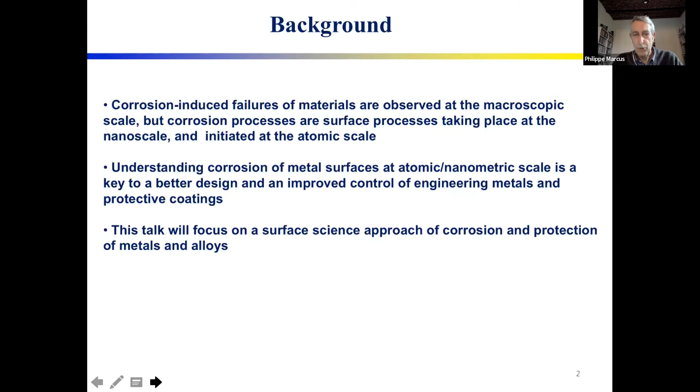What I'm going to talk about today needs maybe a short explanation of the background. Corrosion-induced failures of materials are observed at the macroscopic scale, obviously, but corrosion processes are surface processes, and they take place at the nanoscale, and even initiate at the atomic scale. For this reason, understanding corrosion of metal surfaces at the atomic or nanometric scale is key to better design and improved control of engineering metals and protective coatings. So in this talk, I'm going to focus on a surface science approach of corrosion and protection of metals and alloys.

So all of the data presented today are based on the use of advanced surface analytical techniques, which are combined with electrochemical measurements and, in many cases, combined with DFT modeling and simulation. In a general way, surface oxides and passive films are very important because they cover the metal substrate, and in many cases they protect the material against corrosion. These films are extremely thin, and usually consist of an oxide and oxyhydroxide. Their stability is of primary importance for many metallic materials.

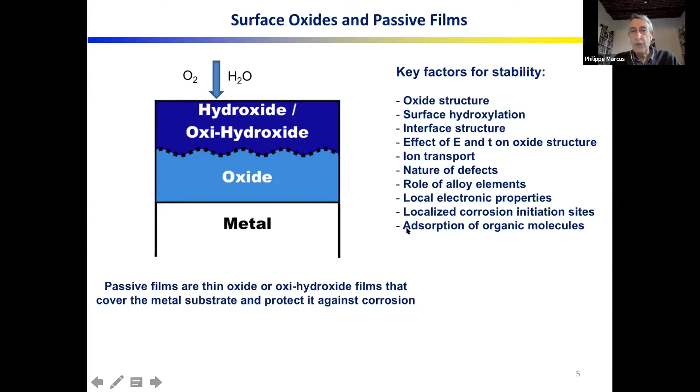To look at these problems, we need methods for the characterization of metal surfaces, oxide films, and corrosion processes. We need high resolution methods if we want to understand the initiation of corrosion. If we want a high image resolution, we use scanning tunneling microscopy. If we want in-depth resolution near the surface, we use time of flight secondary ion mass spectrometry. If we need good chemical state resolution to investigate the nature of surface oxides or surface compounds, we use X-ray photoelectron spectroscopy. If we want mass resolution, which is very important when studying molecules at surfaces like organic inhibitors, we again use time of flight secondary ion mass spectrometry.

As I said in the introduction, we combine these techniques with electrochemical measurements and in many cases with DFT calculations. Among these techniques, I will show results obtained using scanning tunneling microscopy. As a brief reminder, in this technique we bring a metallic tip close to the surface, and if the tip is close enough, electrons can tunnel from the tip to the sample or from the sample to the tip.

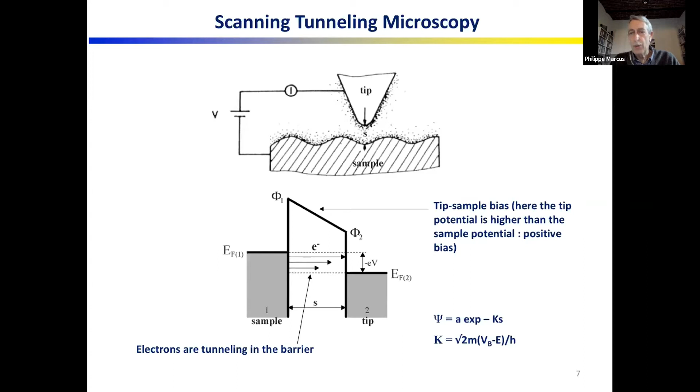We scan the tip along the surface and measure maxima in the tunneling current, which correspond to the position of atoms. So we can get an image of the topography of the surface with atomic resolution. Of course, we can also get an image with lower resolution, but atomic resolution is currently obtained, and this can be done in vacuum, in gas, or in a liquid.

If we use a bipotentiostat, we can do electrochemistry, and at the same time, we can scan the tip and observe the surface with high resolution. I'm going to show some results that have been obtained in the recent past, and then show you what are the current problems on passivity of metals and alloys studied at the atomic or nanometric scale.

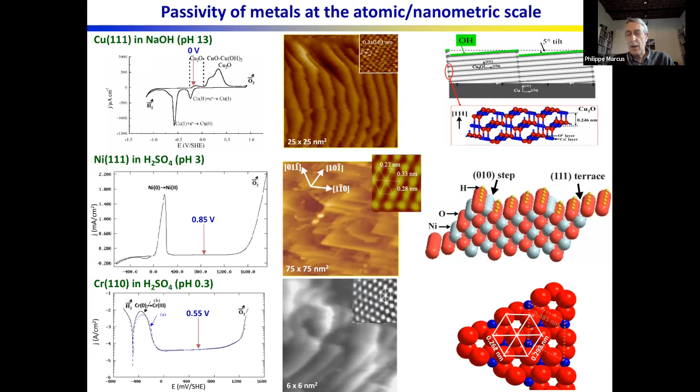So we can say that passivity is now fairly well understood at the atomic or nanoscale, because it has been studied on several metals, not all of them, but several. Some general features: passive films are generally crystalline, we observe epitaxial growth on metal substrates, interface energy is minimized by the tilted growth of the oxide with respect to the crystallographic orientation of the surface, and surface energy is minimized by hydroxylation.

The work I've shown was done on single crystals to get rid of grain boundaries, but these conclusions can be extended to each grain at the surface. They are not restricted to single crystals; they would apply to individual grains of polycrystalline materials. As for grain boundaries, there are parallel studies, because the reactivity of grain boundaries is different from the reactivity of grains. Of course, we need to know about alloys and not only pure metals.

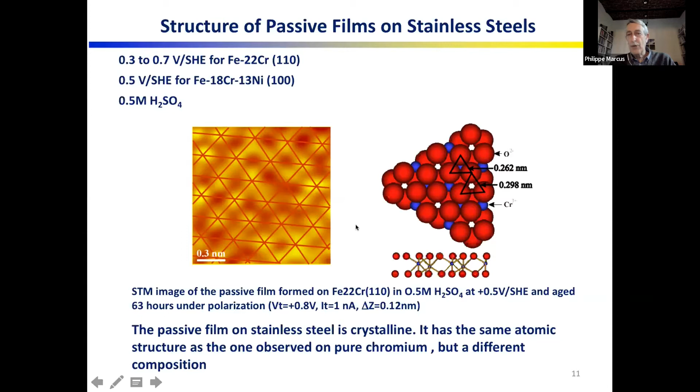We have shown in other works that the time of exposure in the passive region provides better resistance to localized corrosion in chloride solution. This is due in part to the enhanced crystallinity demonstrated here. The other factor is the enrichment of the passive layer with chromium. So chemical effect is of course very important. An oxide rich in chromium has better corrosion resistance than an oxide with less chromium on stainless steel, but also the extent of crystallinity is a critical factor.

So that is where we stand. And of course, there is still something we need to understand better in terms of corrosion resistance, and also how we can improve the corrosion resistance of stainless steels, which is already quite good, but stainless steels are not perfect.

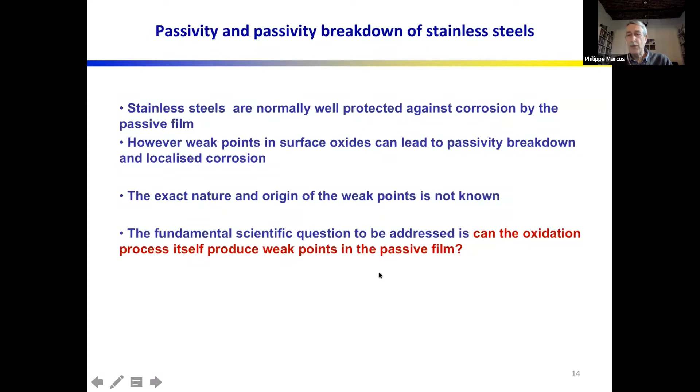And of course, to study that, we need very advanced techniques. This is the equipment we have been using for a couple of years. It's a new platform that integrates multi-technique and environmental tools for spectroscopic, microscopic, and electrochemical analysis of surfaces.

This is a sort of unique equipment in which we can prepare surfaces under gas or in UHV conditions. We can do thermal treatments and transfer samples to different parts of this equipment. In one part, we can look at the structure by scanning tunneling microscopy in a variable temperature system, so we can vary the temperature and also expose the surface to gases. In another part, we can do in situ XPS, that is, XPS in the presence of gas, and make real-time measurements of oxidation in a gas environment.

And finally, we can transfer the samples inside this equipment to a glove box in which we can do some analysis of the solid-liquid interface, with electrochemical scanning tunneling microscopy. So it's a sort of material science or surface science lab in which we can do surface preparation, heat treatments, exposures to gas and liquids, and analyze the surface chemically and structurally without exposing it to air.

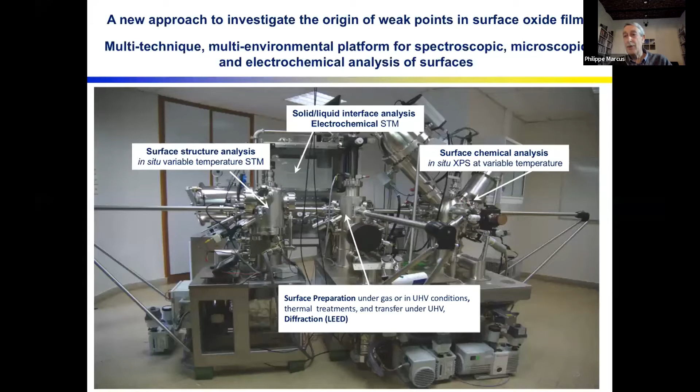So we can look at the very initial stages of reactions, which I believe govern the life of a material. A good part of the life of a material is what happens in the early stages, which remains a major ingredient to understand the life of a material.

So with such equipment, we can prepare very pure, very clean surfaces like what you see here. It's the surface of stainless steel, an austenitic stainless steel. You can see by looking at the XPS that it's extremely clean, there is absolutely no oxide. This is the iron signal here, and this is the chromium signal. We don't show nickel because nickel is anyway not oxidized. But you see that it's a purely metallic surface.

And we can look at the surface by STM, and we see this interesting structure with terraces and steps. We see that under equilibrium, there are vacancies at the metal surface. This is a completely new finding, because people saw that if you had a clean stainless steel surface, you would have no vacancies. But this is not the case.

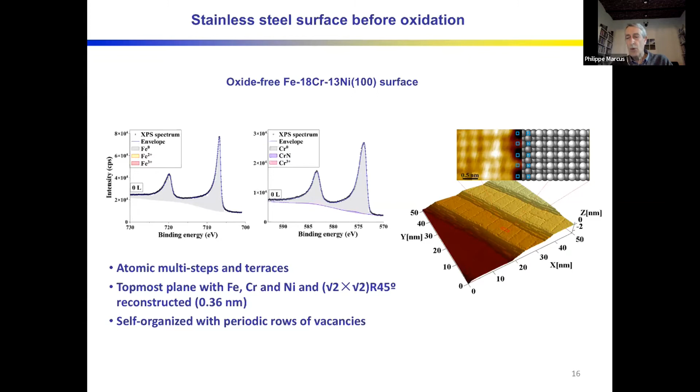There is a network of vacancies, and you can see that these vacancies are aligned in a well-defined direction. So now with such a very clean and well-defined surface, we can look at very early oxidation stages, and we can look at oxidation as a function of exposure.

This was done at 250 degrees in low oxygen pressure so that we have time to follow the phenomena. This can be done in the XPS, and we can measure the oxygen signals while the material is being oxidized, so we can look at exposures that are very low.

Just a reminder, 1 Langmuir is an exposure that is 1 second at 10 to the minus 6 torr of pressure. That's the Langmuir unit in the international system of units. So looking at this scale of time at low pressure is equivalent to looking at just the first few nanoseconds of oxidation at ambient pressure.

That provides a unique way to look at the nucleation and growth of oxides, in that case on stainless steels. We can see that we have first a striking enrichment of chromium at the surface, then it goes down because iron starts to be oxidized.

So this is the XPS. Now we can look at that at the same time by scanning tunneling microscopy. This is a high resolution image before oxidation, with a very clean surface and these rows of vacancies. When we expose this surface to oxygen, you can see these small islands here, which are nuclei of oxides.

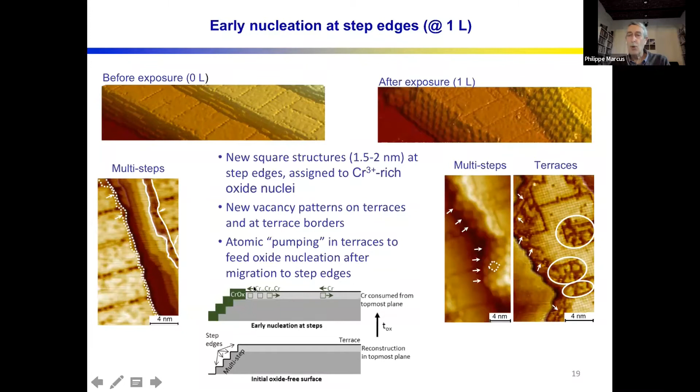We believe that this is a major observation because we can predict that there will be an area here near the step edge where chromium concentration will be lower. So what will happen there?

Then if we continue the oxidation and look at a slightly longer exposure, if you look at the STM image, you can see that now the terraces are also covered by oxide, which have the same structure as at the beginning. So these are chromium oxide islands, but we have other features that are near the step edge.

And if we look at them in detail, they are shown here. They are consistent with the formation of iron oxide rather than chromium oxide. So this is the model here.

At the beginning, we have formation of chromium oxide, so we have depletion of chromium in this area, and that's where iron oxide will then form, just because the chromium concentration has been decreased.

We believe that these areas will be weak points for the corrosion protection by a surface oxide. We did some experiments in an electrolyte, and this is the way the weak points are created by the oxidation process itself.

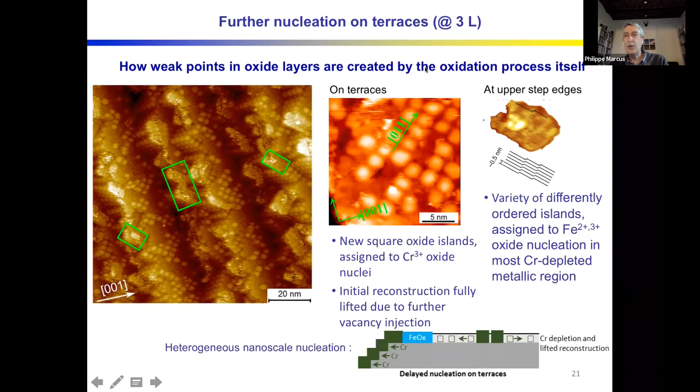Which means that in the future, we will have to find ways to heal this defect. So this opens the way to, I think, a wide range of nano-engineering that we and other labs are now exploring.

So how to heal these defects, these chemical defects that are created by the oxidation process itself, that are independent of the presence or not of inclusions.

Let me now move to another part of this talk, switching to corrosion inhibitors. Why inhibitors? Well, for obvious reasons, surface oxides are not always protective enough, so there is a need for surface treatments that can include conversion coatings, but also corrosion inhibitors.

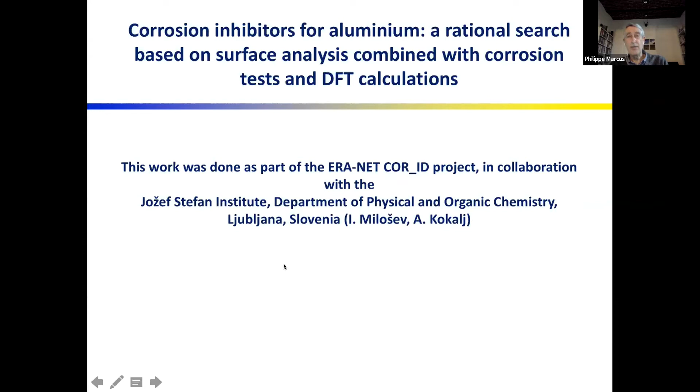So what is the aim of this approach? Well, this is shown here in the background. If we want to provide corrosion protection with organic inhibitors, we need to look at the affinity of organic molecules with the surface, which is, in the case of aluminum, a hydroxylated aluminum surface.

So what do we want to understand? We want to decorrelate, or disentangle, the role of the anchor group on corrosion inhibition and the role of the chain. So what we did here is look at two key factors: the effect of the type of anchor group for a given length of alkyl chain, and the effect of the chain length for a given anchor group, because both the anchoring group and the length of the chain are important.

I'm going to show a few results where, for example, we looked at carboxylic acids with a different number of carbons in the alkyl chain, and then we looked at a fairly wide range of anchor groups for the same alkyl chain.

So let's start with looking at the effect of the chain length. We did that on an aluminum surface. In that case, it was pre-treated so that we have a rough surface which is formed.

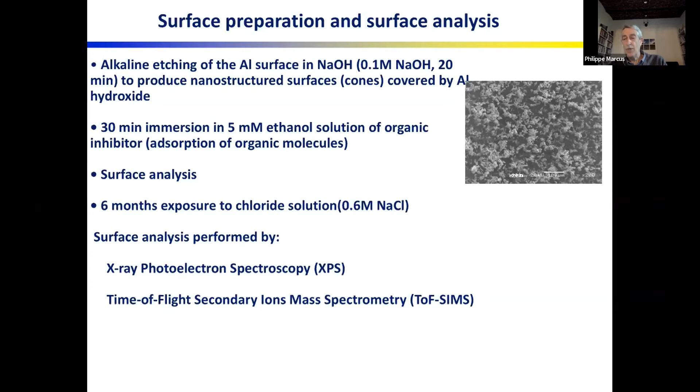Then we expose the surface to an ethanol solution containing the organic inhibitor. We analyze the surface by surface analytical techniques. Then we expose the surface for 6 months in chloride solution, and again we perform surface analysis. So we can combine a corrosion test and surface analysis and try to understand what are the key factors for the choice of good corrosion inhibitors.

So to do that, we used XPS. I think you all know the principle of XPS: we use an X-ray source, photoelectrons are emitted, and we analyze the energy and measure the number of electrons, so we can get an insight on the organic molecule layer, the nature of the oxide under the organic molecules, and the base metal.

And this is the equipment that we are using in my lab. This technique is quantitative, meaning that we can not only identify the nature of the surface species, but we can also calculate their concentration. We can also calculate the thickness of the organic layer, the thickness of the oxide. So it's an extremely high efficient technique.

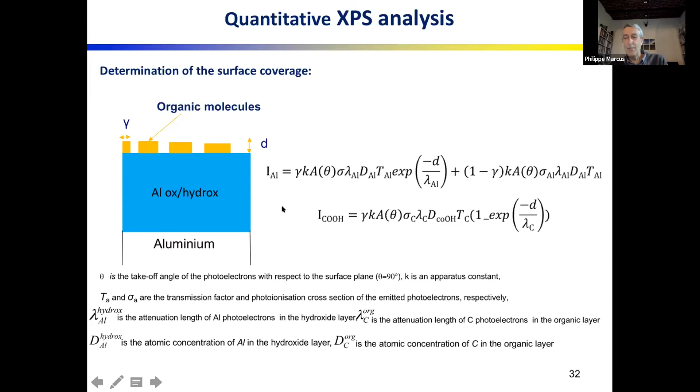We also use time of flight SIMS, which in general for corrosion research, and in particular here for looking at corrosion inhibitors. And this is the principle.

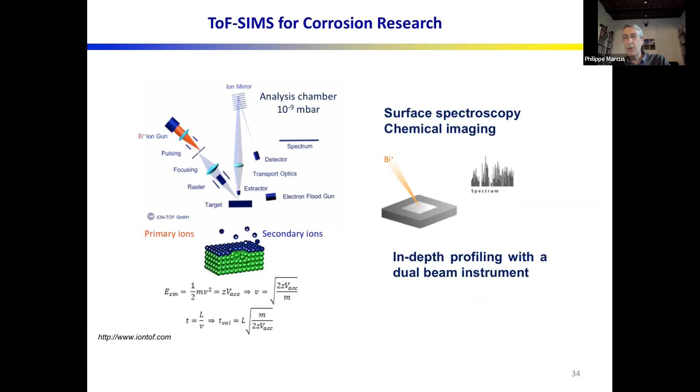Here we have a beam of primary ions that are hitting the surface. Secondary ions are emitted and analyzed, and this analysis provides a mass spectrum in which we can detect all the masses and all the elements at the surface. We can combine this with a second beam to make in-depth profiles. And this is the equipment that we are using in my lab.

So first, we looked at adsorption of octanoic and stearic acids, and the XPS is telling us that both organic inhibitors are adsorbed at the surface. We can state that by looking at the carbon 1s signal. And from the aluminum and the oxygen, we can also derive the chemical states of the aluminum, the amount of oxide and hydroxide.

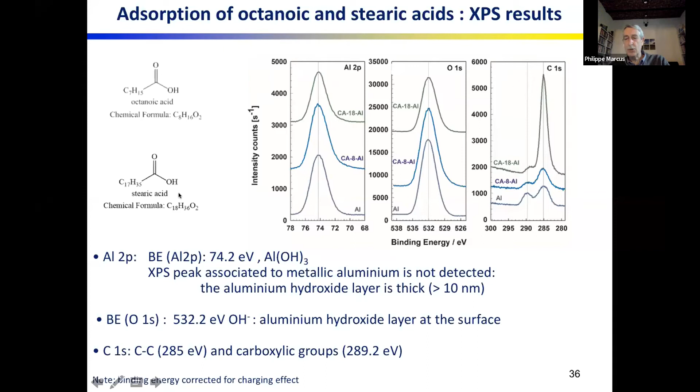So the conclusion here is that both the octanoic acid and the stearic acid are adsorbed at the surface. However, if we look at the quantitative results, we find out that the coverage is different, and that only stearic acid gives a complete layer of organic molecules. The coverage obtained with octanoic acid is lower than the one obtained with stearic acid.

If we look at the time of flight SIMS, so these are mass spectra obtained, the top row for just the aluminum, the reference, is the blank experiment.

Second row, that's after exposure to octanoic acid, and third row after exposure to stearic acid. And you see that, for example, if we look at the mass of octanoic acid, there is a clear signal after exposure to this inhibitor, but no signal in the other case.

So we can conclude that there is indeed adsorption of octanoic acid in this, and this is in agreement with the XPS. Similarly, for the stearic acid, we observe a significant peak at the mass of stearic acid. So this confirms what we have observed by XPS.

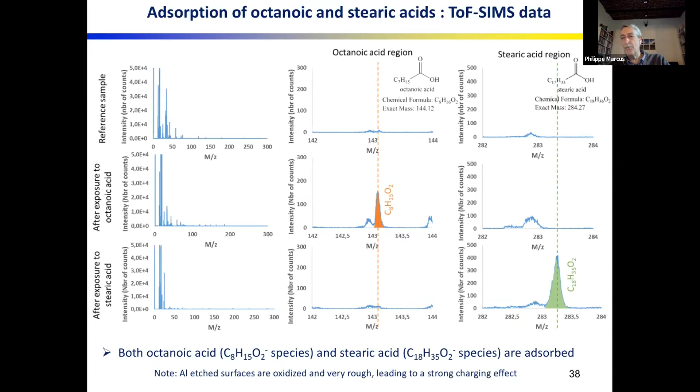With TOF SIMS, we can get an additional measurement, is that we could look at fragments of the molecules that contain aluminum. Here we looked at a fragment containing one aluminum atom, and here we looked at fragments containing two aluminum atoms.

And you can see that if you look at the octanoic acid, we find signals for fragments containing one aluminum and containing two aluminums. And this is also the case for stearic acids. So we can conclude here that the inhibitor is bonded to one or two aluminum atoms.

And this is, of course, a key feature, is the nature of the chemical bonding of the organic molecule to the oxidized surface. Now we look here at the surface after immersion in sodium chloride for 6 months.

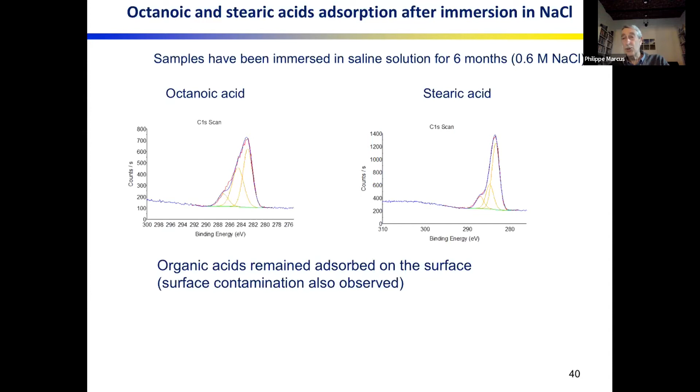And you can see that for both octanoic and stearic acid, there is still a signal associated to the organic acid, which can be observed by looking at the high binding energy where we observe the carboxylate group. So in both cases, the molecules are still there. However, there is also some surface contamination in addition to the presence of the organic acids.

Now we looked at the nature of the carbon chain for some other molecules, octyl benzoic acid, and we also looked at perfluoro inhibitors for comparison. So to make a long story short, we look at the fluorine 1s spectrum for the perfluoro molecule because it's a very good marker of the presence of the molecule.

And in these three cases here that I'm showing with my pointer, you see that we have a fairly intense fluorine 1s peak, which means that all these perfluoro molecules are well adsorbed and bonding to the aluminum surface.

And this is the case also of this octyl benzoic acid, according to the presence of these two CO and COOH functional groups. And we can at the same time, not at the same time, but on the same material with the same inhibitors...

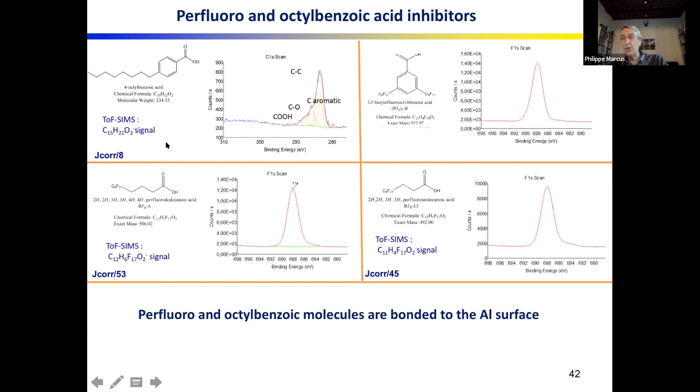We did measurements in collaboration with the lab in Ljubljana on the corrosion current. And what is shown here is the change of corrosion current provided by the molecule. So now what we are doing is we are relating the advanced surface analysis showing whether the molecule is bonded or not with the corrosion test that is telling us what is the beneficial effect of the molecule.

So obviously, you don't expect that they will be good inhibitors.

Now we looked at phosphonic acid, and we looked at this molecule, which is the octyl phosphonic acid, and we could clearly detect the phosphorus 2p signal both before immersion in sodium chloride solution and after immersion. So the conclusion here is that this molecule is adsorbed on the aluminum surface, and it remains adsorbed even after a long time immersion in the solution.

And the same conclusion was obtained by looking at the mass spectra by TOF-SIMS, by looking at molecules that contain the phosphonic group. And we could also look at fragments containing aluminum atoms. And in that case, we could see that the molecules are bonded to 2 or 3 surface aluminum atoms, in contrast with the carboxylic groups that were bonded to 1 or 2 surface aluminum atoms.

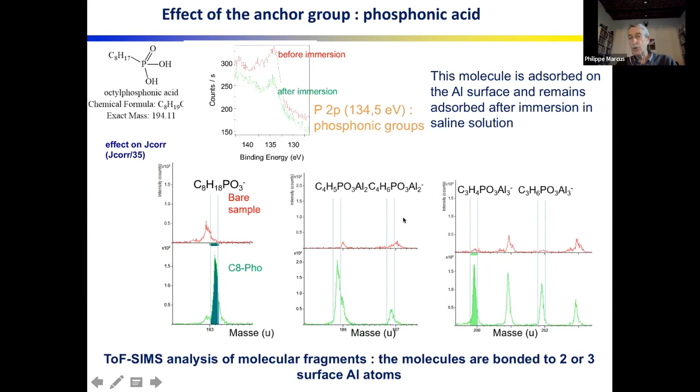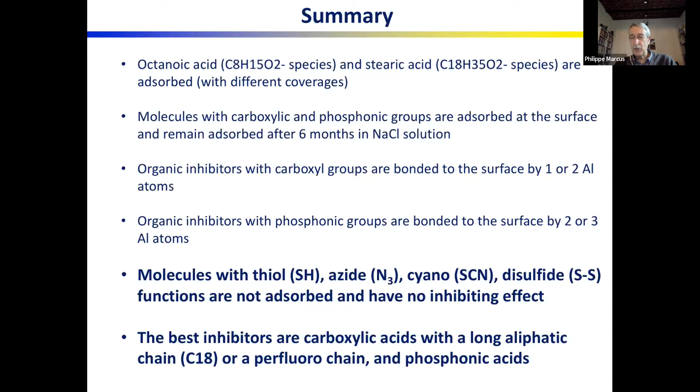Okay, I think my time is over, so I will skip the last part, which was on DFT calculation, but there will be a talk later today on DFT, so DFT will clearly be represented in this symposium.

So just a general conclusion: there has been significant progress in understanding surface corrosion processes at the nanoscale, and I should say also at the nanometric and molecular scale, and that included passivation and inhibition.

And that can be achieved by a surface science approach in which surface chemical and structure characterization is combined with electrochemical measurements. Although I have not shown that today due to lack of time, this is very often combined with modeling and simulation.

And the reason is that the experiments we are doing, being at the nanometric, atomic, or molecular scale, can be directly translated into DFT.

And that's very important, because when you choose the model in DFT, you need experimental results to choose the right model. And as our experiments are done at the same level in terms of dimensions as DFT, we can use the measurements to start with the right DFT model.

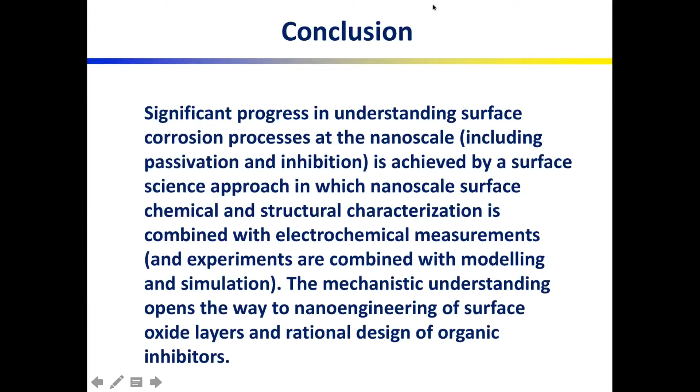Yes, I have just one question for the Professor. Yes, in the area of inhibitors, this is a fundamental study, which is very important. But I want to look at the industrial application. For example, you are using aluminum as the metal, so which industry is this for? And then you use a sodium chloride environment at 0.6 molar. Which industry is this for?

Well, of course, this is one brick that you need to build the wall. I have today shown what we are doing on aluminum. We are doing something similar on copper, and actually the DFT I was going to show was on copper. We are also doing a lot of more applied work, but I wanted to show you the fundamental work. The more applied work we do essentially on aluminum alloys, and we have a lot of connections with the aeronautic industry in France. So we have research contracts with the aeronautic industry, and we look at alloy 2024, where the main problem is how to inhibit corrosion where we have intermetallic particles. The intermetallic particles are rich in copper, but they also contain aluminum. So the approach is step-by-step, going from model systems like pure aluminum, pure copper. We have also published papers on compounds that we synthesized that have the same composition as the intermetallic particles, for example Al2Cu, which is the main intermetallic particle in alloy 2024. And then we also work on the real alloy. So it's very ambitious, because we start from simple model systems, but we try to go all the way to the alloys, in particular alloy 2024 for the aeronautic industry.

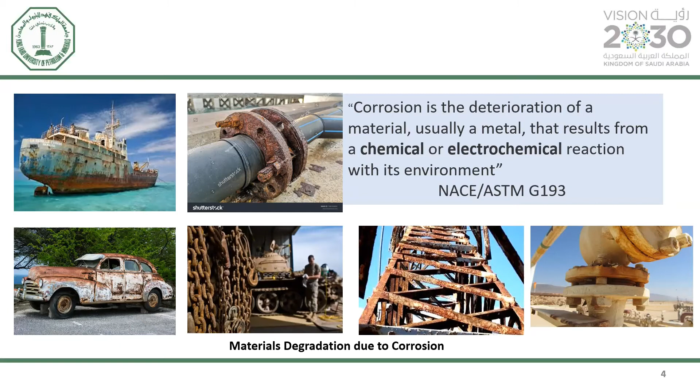There are a lot of consequences and impacts of corrosion. First, look at the consequences. These are images of some of the consequences due to corrosion.

In Belgium in 2004, there was an explosion of a pipeline due to corrosion. In southern Taiwan in 2014, there was also an explosion due to corrosion. So corrosion has a lot of safety and environmental consequences.

There are a lot of impacts, from energy and fuel infrastructure to health and safety, national treasures and artifacts, national security and readiness, environment, critical infrastructure, and economic security of any nation. So corrosion has a lot of impacts, and that is why we try to find solutions to this menace.

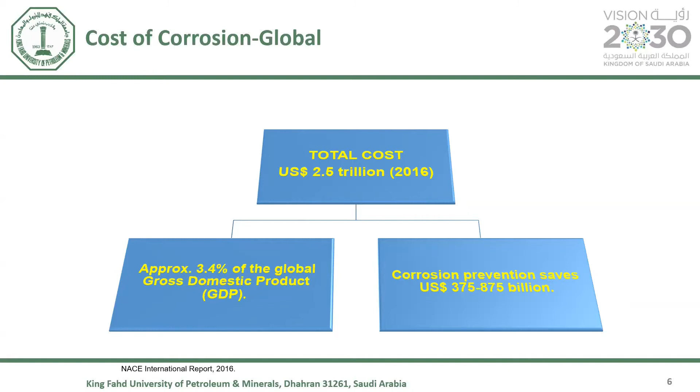The cost of corrosion globally - we have heard this before - in a study by NACE in 2016, the total cost amounted to $2.5 trillion US, which is 3.4% of the global GDP of developed nations. It has been estimated that about 375 to 875 billion US could be saved using proper mitigation approaches.

If we move to the Middle East, the Gulf region, we found that among the Middle Eastern countries, Saudi Arabia has the highest cost of corrosion, amounting to close to $25 billion US. This study was conducted in 2011.

Generally, I want to take you to understand a broader field of applications of corrosion inhibitors. Corrosion inhibitors are applied in a lot of fields. This is not exhaustive - there are many industries which I have not listed here, but briefly.

It can be applied in industrial cooling waters. In the military, military assets require protection using corrosion inhibitor, in the marine environment. In power plants, we're talking about thermal power plants, nuclear power plants, even renewable like geothermal plants. All these plants are constructed using metals, and they are prone to corrosion. Corrosion inhibitor is one of the solutions to mitigating this corrosion.

In the automobile industry, corrosion inhibitor is very vital. In the construction industry, in bridges, in steel rebar, in concrete, it's important to apply corrosion inhibitors. In oil and gas, both upstream and midstream, and in the downstream refinery operation. Even in aerospace, as Professor Philippe Marcus presented, corrosion inhibitor is very, very useful. That is why it is one of the important solutions for corrosion mitigation.

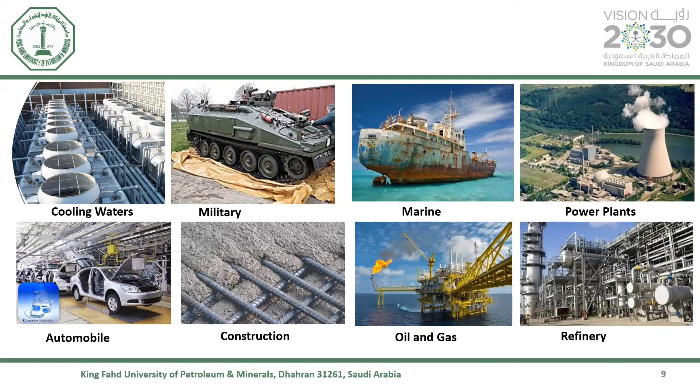For the oil and gas industry, we have the upstream, which is oil and gas exploration and production. We have the midstream, which is transport and storage. And then we have the downstream, which is refining and distribution. My focus here will be just the upstream and the midstream. We want to see corrosion inhibitor development in these two areas.

So what are the corrosion challenges facing the oil and gas industry? As you can see, they are enormous.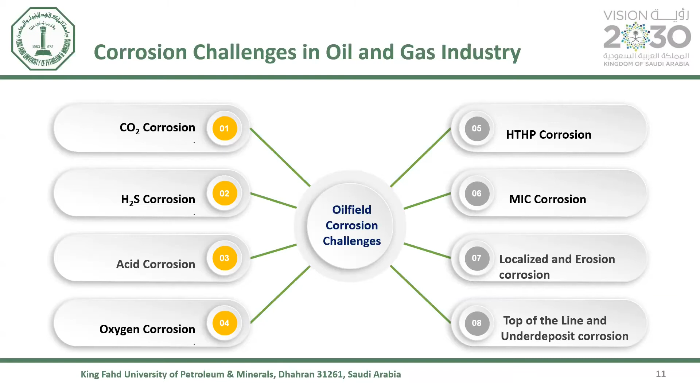We talk about CO2 corrosion, the so-called sweet corrosion. We talk about H2S corrosion, the sour corrosion, which is prevalent in this region, the Gulf region, mostly sour crude. We talk about acid corrosion during acid stimulation of the well, acidizing processes, oxygen corrosion during drilling operation. High temperature, high pressure corrosion - this is for deeper wells where high temperature and high pressure can be encountered, so this type of corrosion is common. Microbial influenced corrosion, MIC, then localized and erosion corrosion. Then we have top of the line and under deposit corrosion. So you see there are a lot of corrosion issues facing the oil and gas industry.

Here you have some examples of oil field corrosion. Starting with top of the line corrosion, that means corrosion at the top, especially the 10 to 2 o'clock position of the tubing here, where normal corrosion inhibitor at the bottom of the well cannot really protect the top. Then we have some of the degradation due to CO2 corrosion here, and H2S corrosion, where you see formation of the iron sulfide, which is normally black in color.

We also have corrosion at preferential welds, and pitting corrosion, which is one of the severe damages. General corrosion is not really very important, but severe damage, localized corrosion due to pitting is very difficult to mitigate. Erosion corrosion due to wear or flow. Under deposit corrosion formed due to formation of scales on the pipe.

And then the microbial corrosion, which is very, very important too, due to reduction of sulfate to sulfide by sulfate reducing bacteria.

So in the oil and gas industry, these are the proportion of failures that are normally witnessed. The causes of failure related to CO2 corrosion is up to 28%, hydrogen sulfide corrosion 18%, and preferential weld corrosion 18%. So the first four - CO2 corrosion, sour corrosion, preferential weld corrosion, and pitting - constitute the majority of failures that normally happen in oil and gas production. But that does not mean erosion, galvanic, crevice, impingement, and stress corrosion cracking are not also common. The major problem is normally related to sweet corrosion, sour corrosion, pitting, and preferential weld corrosion.

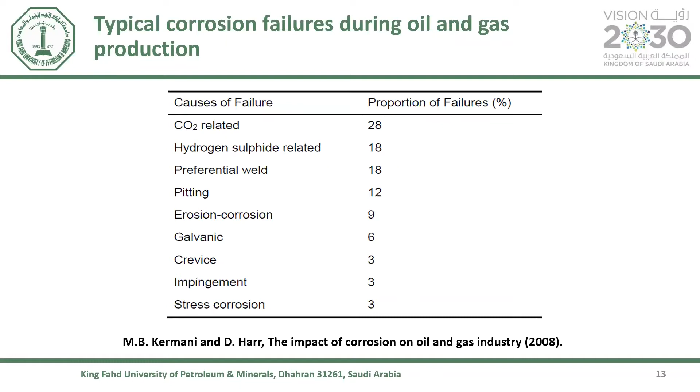So what are the corrosion control methods? Basically, in the oil and gas industry there are several solutions for mitigating corrosion: material design to give corrosion allowance, corrosion resistant alloys where you cannot use carbon steel, cathodic protection systems always coupled with surface coating, and using chemical treatment called corrosion inhibitor. Here I will focus on the corrosion inhibitors.

First, let's look at the corrosion inhibitor market. Globally, in an analysis published by Saudi Aramco, it was found that almost 45% of the market is controlled by two oilfield chemicals: demulsifiers and corrosion inhibitors. Corrosion inhibitors globally make up to 20% of the global market. In the Middle East region, about 60% of the oilfield chemical market is also controlled by demulsifiers and corrosion inhibitors, with corrosion inhibitors taking about 21%. This shows the importance of corrosion inhibitors in the continuous survival of oil and gas production.

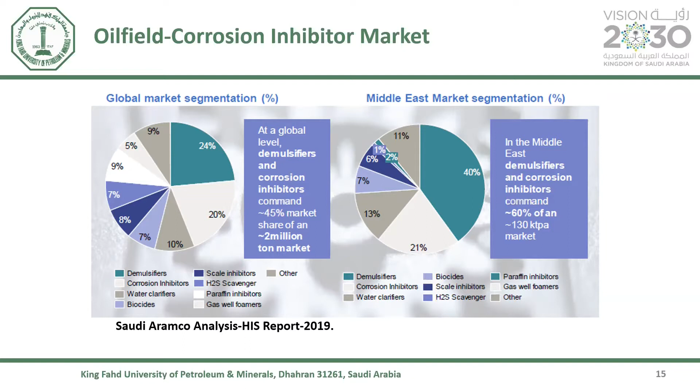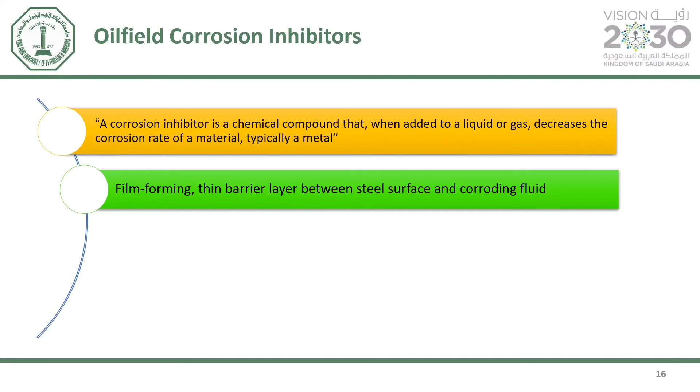Remember, here I'm focusing on oilfield corrosion inhibitors. A corrosion inhibitor is a chemical compound that, when added to a liquid or gas phase, normally decreases the corrosion rate of the material - typically we are looking at the metal. They act by forming a thin barrier film between the steel surface and the corroding fluid. Normally it works by a chemisorption mechanism, where there is interaction between the molecule and the metal surface. They are applied at ppm levels, and for oil and gas applications they are normally complex mixtures, not a single molecule. They are formulated using different combinations of chemicals.

Here is the general classification of corrosion inhibitors. We have inorganic inhibitors, which are mostly toxic, classified into anodic - which can be oxidizing, like chromate, or non-oxidizing - and cathodic inhibitors like phosphate, which work by precipitating on the metal surface. We also have environmental conditioners or scavengers, which change the pH of the environment and can scavenge corrosive molecules and ions like H2S. We also have organic corrosion inhibitors, which primarily work by affecting both the anodic and cathodic reactions, and mainly act as film formers. In this class, some are toxic and some are non-toxic.

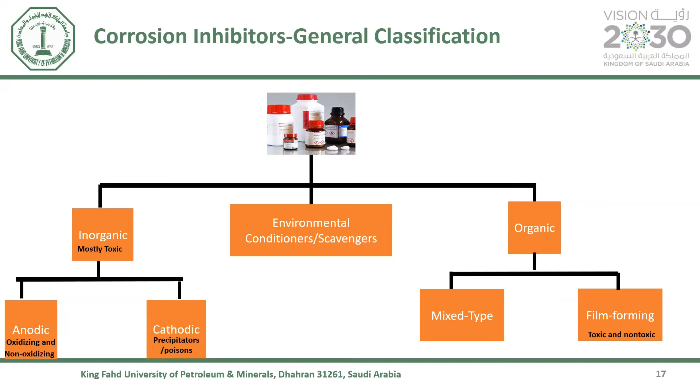These are the class of inhibitors normally used in oil and gas applications - the film-forming type. In the oil and gas industry, corrosion inhibitors are classified into film forming, oil soluble, water soluble, and oil soluble water dispersible. All these classes are classified based on their application.

For example, film forming inhibitors will form a film on the surface, wetting it and forming a hydrophobic layer, mainly effective for CO2 and H2S corrosion. Oil soluble inhibitors are normally used for lower water cut and are very effective for stratified or turbulent flow regimes. Water soluble inhibitors are used when you have higher water cut, and can also be effective for stratified or turbulent flow regimes. Oil soluble water dispersible inhibitors can be used with all water cuts, and this kind can partition between the oil and water phases.

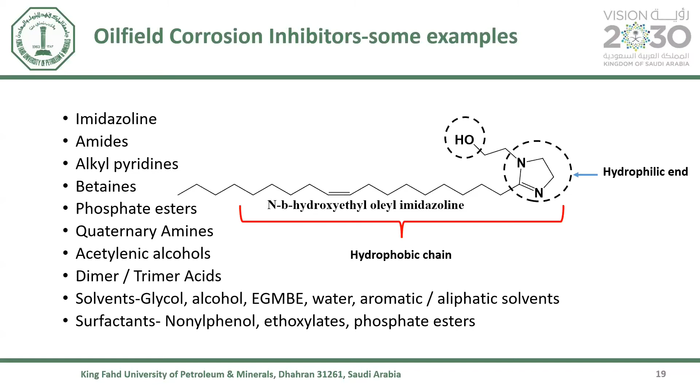Here are some typical examples so you can see how corrosion inhibitors work. This diagram shows the hydrophilic end, which can bind to the metal surface, and the long alkyl chain end, which forms the hydrophobic film on the metal surface and displaces water from the surface. Some typical examples used in the industry include imidazolines, amides, alkyl pyridines, phosphate esters, and quaternary compounds. They also use some solvents and surfactants.

So basically, how does corrosion inhibitor work? Normally you have the surface of the pipe, you have the active group, which is the hydrophilic group that binds to the metal surface. You have a lot of CO2, water, H2S, and salt, what we call brine water. So what the inhibitor does is use the active head to displace the water from the surface and attach to the pipe, whereas the hydrophobic group will displace the water and form a thin film on the surface of the metal.

There are a lot of factors that affect the performance of corrosion inhibitor in a typical oil downhole tubing or transportation pipe. For downhole wells, temperature is very critical. Sometimes the temperature can go up to 300 Fahrenheit, sometimes more, especially when dealing with deeper wells.

We have very high sour systems, greater than 20% H2S, and this will affect the performance of corrosion inhibitor. The presence of solids in the tubing, velocity - this is very important because if you have very high flow rate, your inhibitor might not withstand very high shear stress.

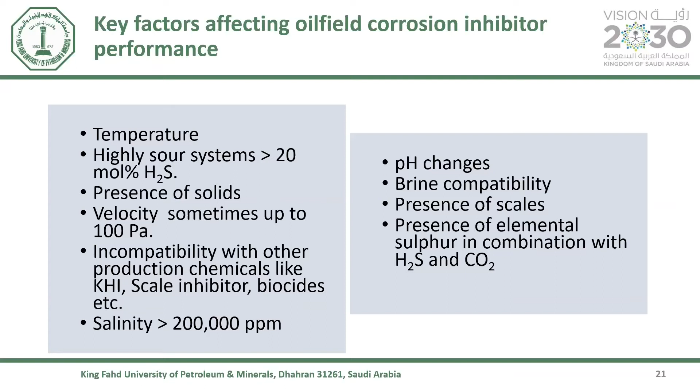So here I want to describe corrosion inhibitor laboratory development, the PASS approach. The normal selection is done by first selecting hundreds of active chemicals, normally done by trial and error. Many libraries of active chemistry are screened, and then tested using the so-called bubble test just to screen them. After screening, a few that are performing will be moved to the next stage of chemical formulation, and then they will further undergo some screening tests to select the best formulation.

From the screening stage, you move to selection of the best formulation using more severe conditions, where we can use rotating cylinder electrode, autoclave testing. Sometimes we use a flow loop and jet impingement just to simulate very high shear stress. Then you can also carry out characterization if you want to understand whether there is pitting - you use a surface profilometer to analyze the pitting, and other surface characterization tools.

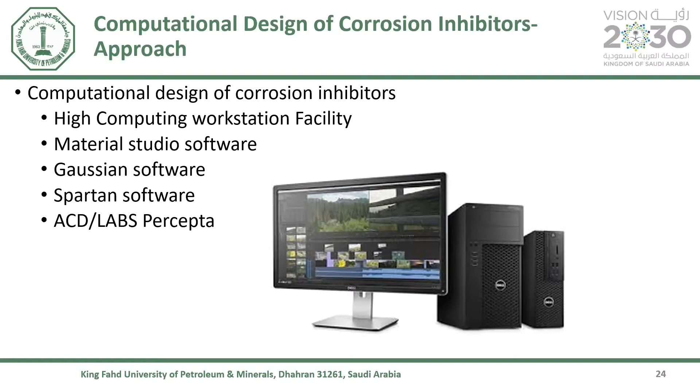We have Material Studio software, which is very excellent for DFT calculations and molecular dynamic simulations, Gaussian software for DFT. We also have Spartan software, which is very accessible for calculating chemical properties of molecules, which is very important too. And we recently acquired this software, Percepta, which is good to predict toxicity of molecules and some physical properties of molecules. Here I will explain to you the typical approach of how this computation works.

There are a lot of properties of molecules. Normally, molecules work by, if you know their physical properties, their chemical properties, you can determine the application of a molecule. So if you select a molecule, first of all, what do you do?

You could compute the physical properties, toxicity properties, such as log of hydrophobicity, which tells you whether that molecule will form a film on the metal surface, and solubility, which is very important in corrosion inhibitor selection, because you have to know whether your molecule will dissolve in the water phase or the oil phase. This is important because it's more expensive to test solubility experimentally.

So we could predict solubility of these organic molecules. We can determine the molar volume, the pKa, which is very important in describing the electronic donor ability of your molecule, because your molecule must donate electrons to the metal to bind or chemisorb on the metal surface. And also we could predict acute toxicity. So these are just a few properties that we could predict using this Percepta.

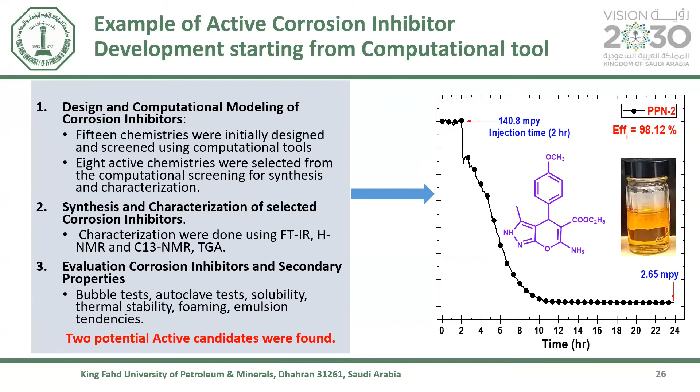So what is the future approach? The future approach will be using machine learning, artificial intelligence. The first approach is trial and error, like we said before - a lot of effort in selecting chemistries, several chemistries, carrying out a lot of testing to qualify the active component before doing formulation. This requires expensive materials and equipment, is very laborious, and requires large manpower.

Now the current approach which we are currently using, computational screening, will save costs and reduce time for development, but it still requires a lot of testing. Because after you use a computational tool, DFT, to look at the electronic properties and adsorption properties, and use a lot of computational tools to also screen diffusion of the molecules, all these properties you still need to test to validate your result, because computational tools alone cannot validate your work. You need to do experiments just to confirm whether your result is in agreement.

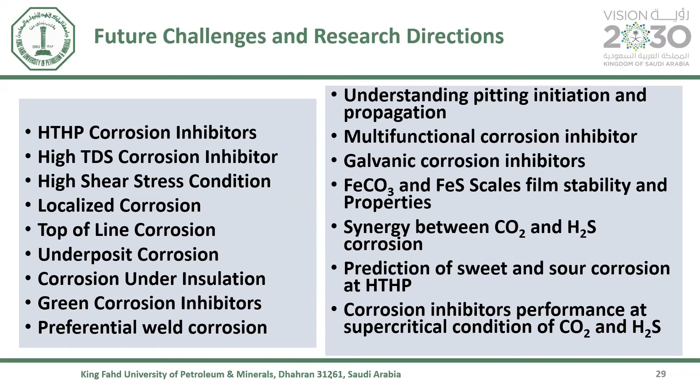These are some of the challenges I've outlined here, because deeper water wells available have very high TDS, high temperature, high pressure conditions, high wall shear stress, CO2 and H2S. So how can we develop corrosion inhibitors that can meet these requirements? We need high shear corrosion inhibitors with high efficiency, exceeding more than 150 degrees Celsius, high thermal stability, high persistency especially for batch application, while also meeting environmental requirements and compatibility with high TDS brine. So this is a huge challenge.

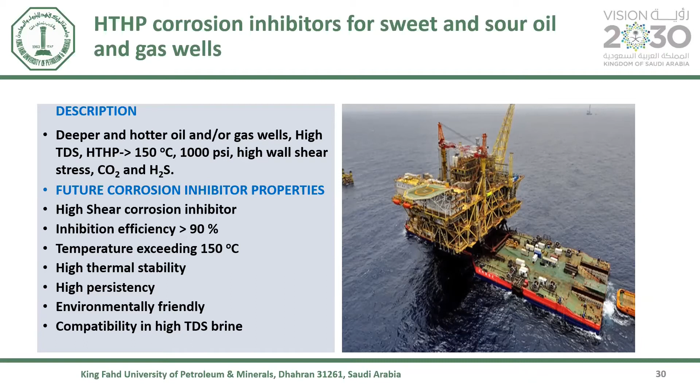Top of the line corrosion inhibitor: how do we develop a corrosion inhibitor that can be effective in the presence of acetic acid and protect the upper part of the pipe, with efficiency of like 90%? This kind of molecule must have appreciable vapor pressure because you need to vaporize it to protect the top of the pipe. This is one of the conditions, and it must also have very high thermal stability.

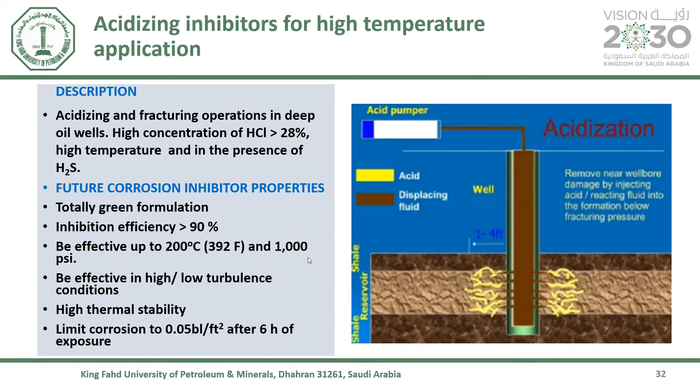Another important challenge for the future will be corrosion inhibitors for high temperature acidizing oil and gas wells. During acidizing, high concentrations of mineral acid are pumped into the well, and this can lead to corrosion, so corrosion inhibitor is normally added. So how can we develop corrosion inhibitors that are totally green, more than 90% effective, and can protect up to 200 degrees Celsius and up to 1000 PSI or more? They could be effective in high turbulent flow or low turbulent flow conditions, with high thermal stability. These are some of the challenges that will need to be overcome.

In conclusion, I would love to thank the industrial partners that support our research in the center: Saudi Aramco, KAUST, SIPChem, and SWCC. They have funded some of the projects that we have conducted over the years. I will end here and entertain questions from you.

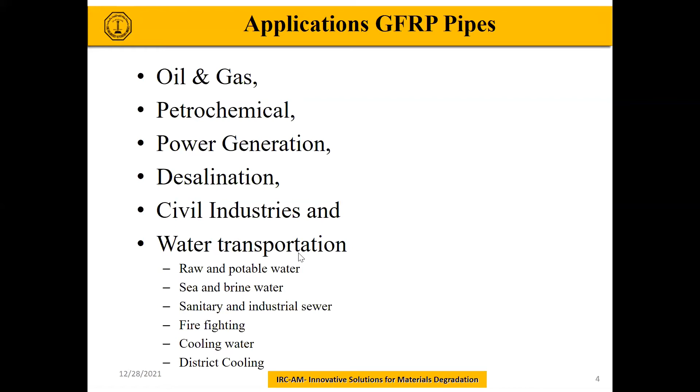The factors affecting the piping materials are usually the chemical factors such as oxygen, H2S, chlorine, and carbon solubility. Physical factors, our colleagues have talked about that, temperature and pressure. We also have biological factors, which are the biofouling, hard shells, plant life, etc.

The use of conventional materials in seawater of the Arabian Gulf and the Red Sea exposes it to high TDS, usually between 40,000 and 65,000 ppm, dissolved gases, organics, and other aggressive elements. All of these acting alone or simultaneously will contribute to material degradation.

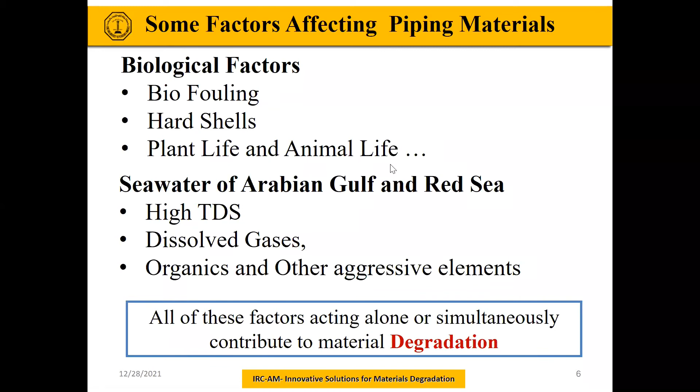And that has been explained very well by our colleagues in terms of corrosion.

So the polymer-based composite pipes bring in high corrosion resistance, high strength to weight ratio, extended service life, design flexibility, low maintenance, long-term durability, and low thermal conductivity among the advantages. There are some disadvantages, as we will see in some of our results here.

Composite materials are manufactured by many techniques, such as hand layup and spray up, resin transfer molding, compression molding, centrifugal casting, vacuum assisted resin transfer molding, and filament winding.

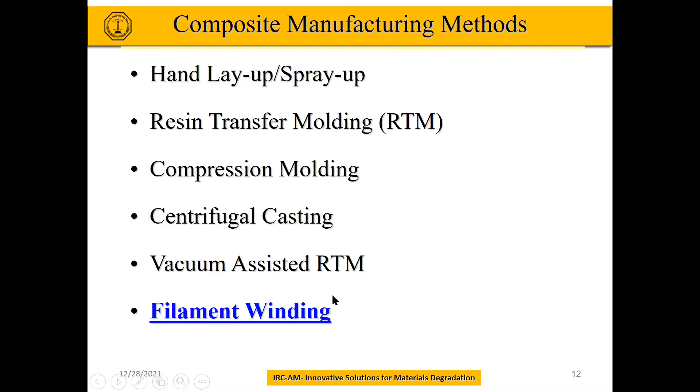The pipes we are going to be talking about are manufactured by the filament winding process. As you can see here, this is the process used by Bondstrand and Future Pipe.

They are winding the glass fiber at an angle of about 54.5 degrees. That increases mainly a number such as flexural properties of the pipe, and helps also in tensile properties.

The objectives of the project that we had with Aramco 10 years ago was to look at the degradation of mechanical and physical properties of 6-inch diameter glass fiber reinforced vinyl ester.

We have been provided with 2 batches of vinyl ester, one which we will call GFR-V1, and the second one we'll call GFR-V2, and a batch of glass fiber reinforced epoxy, which will be exposed to a wide range of harsh natural and accelerated environmental conditions.

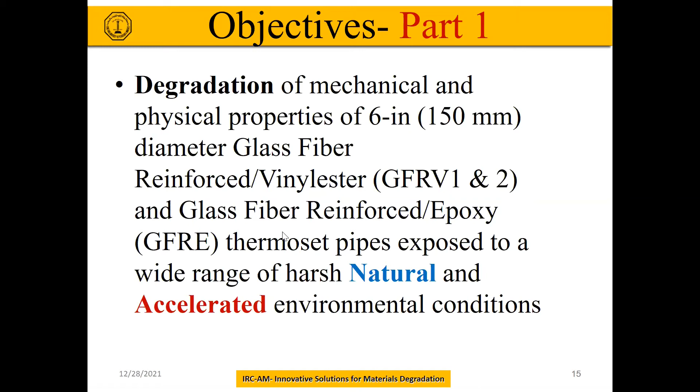And we will be looking at how these environmental conditions are going to affect some of their mechanical and physical properties.

These are the materials and the exposure conditions that we went through. We used outdoor exposure for 6 months to 54 months in Dhahran.

We used seawater filled pipes exposed to outdoor temperature, and crude oil filled pipes exposed to outdoor environment.

And we used seawater immersion that was done at the KFUPM beach. I think we can see here Dr. Zohair and Dr. Faleh Sliman and the rest of us pushing this test facility into the waters here.

So for the duration, the first time every 3 months we will pick up the parts and make specimens and test them. Then every 6 months, then every year after the second year.

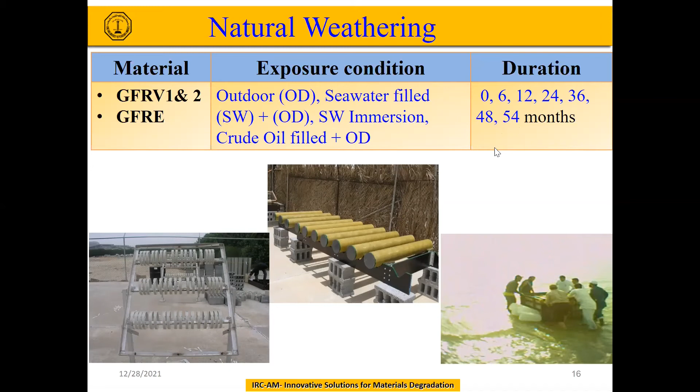For the accelerated weathering, we have used only GFR-V2 and GFR-E.

We exposed them to dry heat at 40 degrees in the environmental chamber, and dry heat at 70 degrees, salt spray, UV in the environmental chamber, seawater spray, UV plus high temperature plus humidity in the environmental chamber, and oxygenated, 100% oxygenated seawater.

And as you can see here, the duration of the exposure was 300 up to 10,000 hours.

And every period of time, we will pick up the specimens, which are ring specimens, and we test them.

We look at the tensile properties, flexural, stress rupture, impact, low velocity impact, burst tests, fatigue tests, and strain corrosion cracking tests.

We measure also the weight gain, glass transition temperature, and the cross-linking index. And we look at their microscopy, and we look at the fractured surfaces to see what are the mechanisms of fracture.

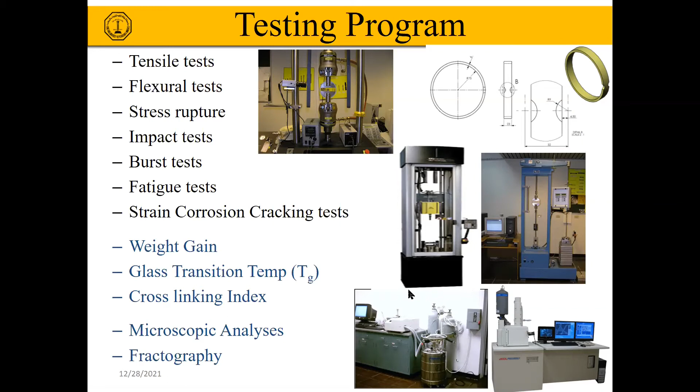So we had a battery of 5 creep testers that were used at the same time. So let me start with some results for GFR-V1.

First, let's look at how the weather affects the color of the material. What you see here is the greenish-yellowish color of the as-received pipe. After 24 months, it starts to discolor and becomes brown. Then after 54 months, fibers start coming out, meaning the layer of epoxy or vinyl ester starts to degrade.

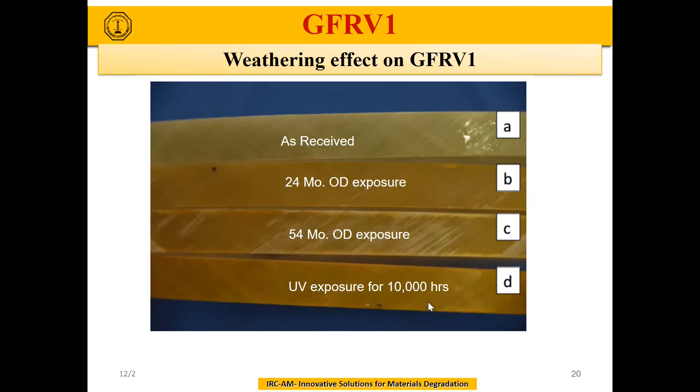For UV exposure at 10,000, which is equivalent to about 36 months of outdoor exposure, we looked at the tensile strength of these vinyl ester specimens after 3, 6, 12, and 24 months of outdoor exposure, for outdoor and oil-filled pipes, and also seawater-immersed pipes after 12, 24, and 36 months.

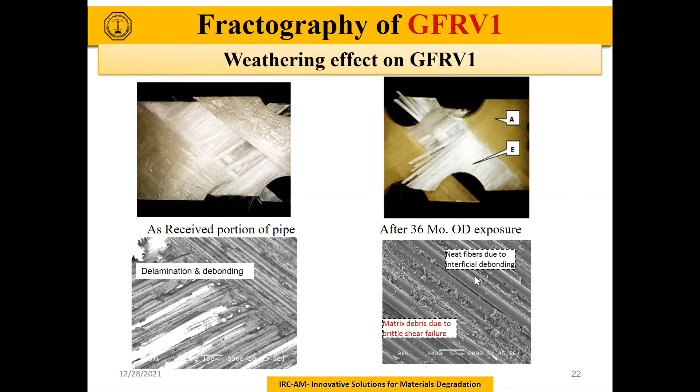We looked at the fractured specimens. This is the as-received portion - you can see delamination and debonding in this area. After 36 months of outdoor exposure, you can see matrix debris, indicating brittle shear failure of the matrix and degradation of the vinyl ester matrix. You can also see neat fibers, which are due to lower interfacial debonding.

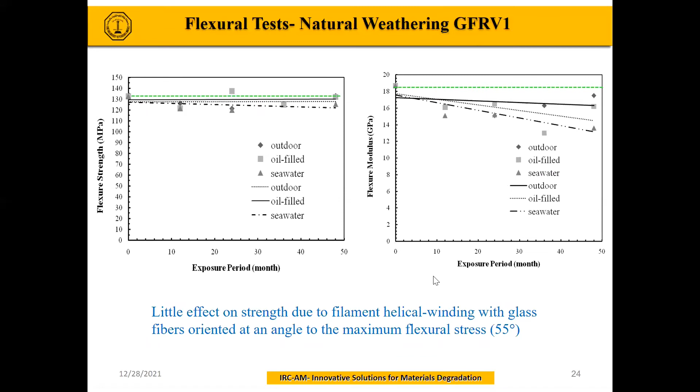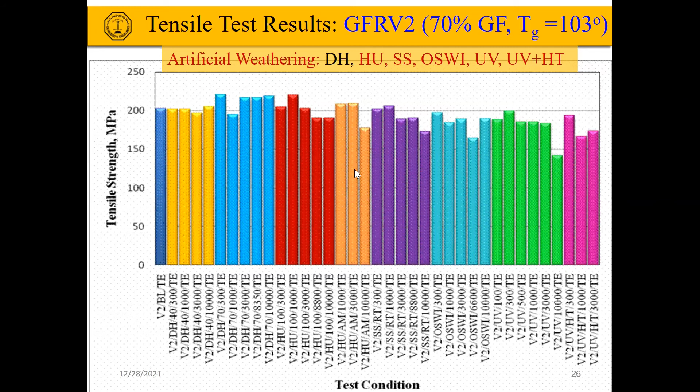Now some results about glass fiber reinforced epoxy, which has a fiber content of about 60%, and these are the tensile properties.

I'm having problem getting rid of this bar, this zoom bar. Any way I can get rid of it? The black bar - we don't see it, Doctor. You don't see it, but it's covering, it's blocking your side. Anyhow, you can just click the dash, the small dash, you can click, it will minimize it. It doesn't - you can move it away. I will keep on playing with it up and down.

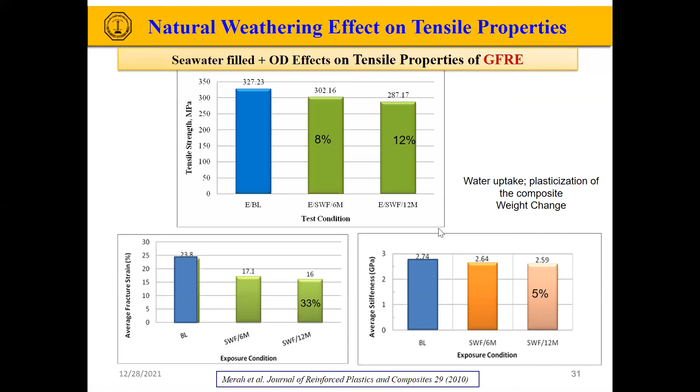We looked at the fractured surfaces, and we have observed this is the as-received glass fiber reinforced epoxy pipe. We see that there is good interfacial bonding, there is interfacial debonding, and there is fiber breakage. But you can see that the fibers are well embedded into the epoxy.

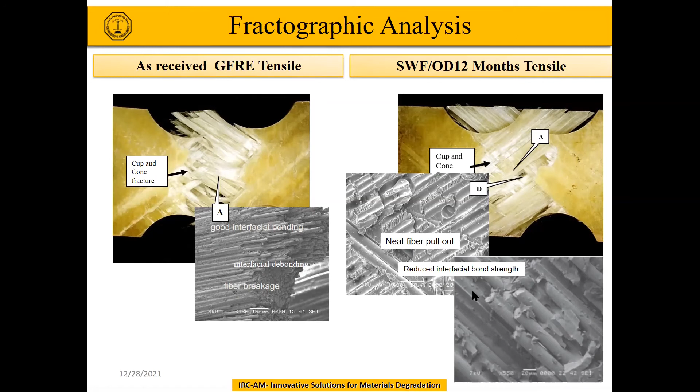For 12 months exposure, you can see that there is a neat fiber pull out. There is a reduced interfacial bond strength in this area. So there has been degradation of the interfacial strength between the fibers and the matrix.

Accelerated weathering of GFRE - we put the pipe sections into salt water, oxygenated salt water, and we looked at the tensile strength after 300 hours, 1,000 hours, 3,000 hours, and 10,000 hours. After 300 hours, the tensile strength reduced by about 11%. Then up to 3,000 hours, there must - I don't know - maybe the water uptake was saturated. The maximum after 10,000 was a reduction of 13%.

If you take into account the scatter, that means after 3 months, it seems like the water uptake has saturated. The ingress of oxygenated seawater reduces the strength of GFRE after 300 hours by degrading the fiber matrix interfacial bonding. We looked at also at the stress rupture.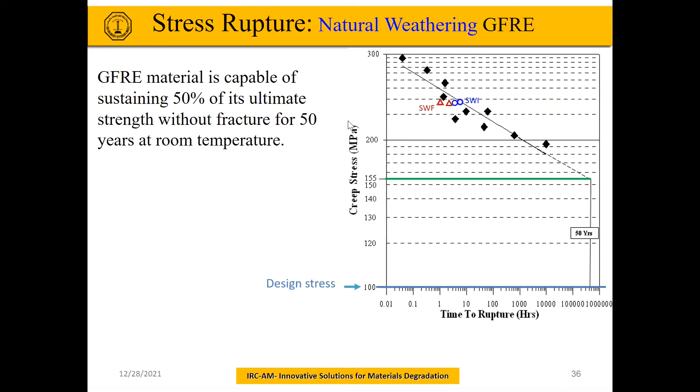of GFRE. And let me conclude this first part, which was the work that we have done, part of the work that we have done for Saudi Aramco. Though there is evidence of weathering degradation of both GFRV and GFRE, they still exhibit long-term durability under the environmental conditions. What I have presented here is only few of the results.

Epoxy seems to be more susceptible to moisture, and its tensile strength and other properties degrade with exposure to water. So in order to improve the barrier properties of epoxy, we started looking at modifying the epoxy matrix with organically modified nanoclays. That was another project that we got with KACST and STIP.

Nanocomposites, usually when you're using nanoclay, were first practically used by Toyota researchers in the 1990s. They used it with nylon 6, I guess. But more and more it's being used with other polymers in order to increase their physical and mechanical properties.

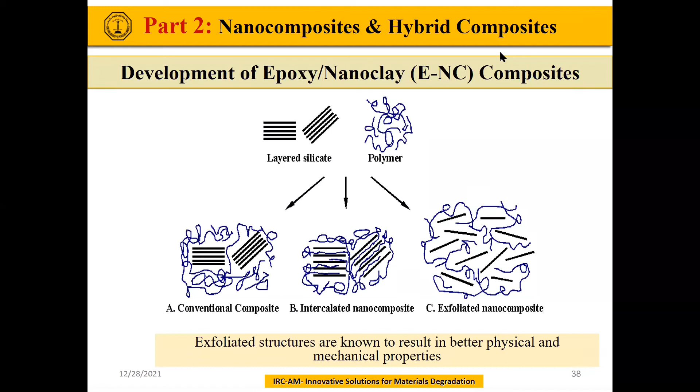Sorry, Professor, the slide is frozen. I don't know, I'm the one who is frozen, or Dr. Ahmed, can you confirm, is it frozen? Yes, at the XRD spectra? Anyone? No, it's not there. You are on slide 38. What happened? What can I do, Dr. Rami? Maybe you should stop and come back? Maybe you can stop sharing and come back, please. Let me, okay, a new share. Can you see it now? Yes, yes, great. So I think I don't have to. Okay, yeah, just move on.

So we looked at different mixing techniques, different clays, different ways of making this, and we ended up with 2 patents for ending up with an exfoliated structure that you can see here. We were able to get mainly disordered intercalation and exfoliated structure every time we went through the process that we have designed, and exfoliated structure is what we want.

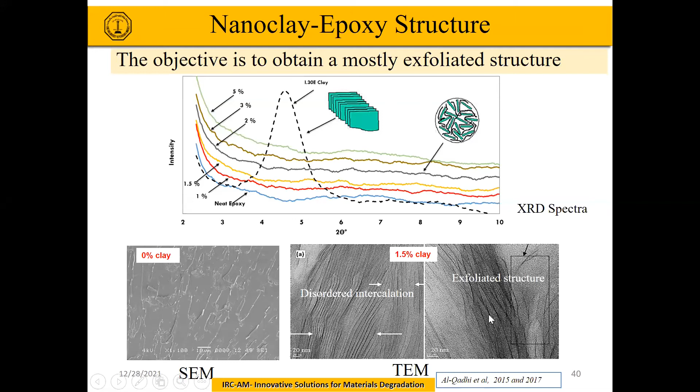The objective is to obtain a mostly exfoliated structure. Once you have this mixture of intercalated and exfoliated structure, you can see the effect of addition of nanoclay on your tensile strength. For example, here with 1.5 or 1% of nanomer addition, we have increased the tensile strength by about 10 or 11%.

After that, once you go beyond 1.5%, we have done other things with 1.5, it starts to decrease. That is because of the presence of clustering of nanoclays and the presence of voids. Actually, we were not able to obtain an exfoliated structure after 2% of the nanoclay loading.

But up to 1.5%, the tensile strength was improved, and the flexural strength also was improved up to 1.5%. You can see this is about 14% improvement in the flexural strength.

If you look at the fracture surfaces, you see that the neat epoxy has a smooth, brittle cleavage type fracture. The nanocomposites have rough and corrugated surfaces. And for 5%, you start seeing voids and clusters of nanoclays. So that is the material that becomes now our new matrix.

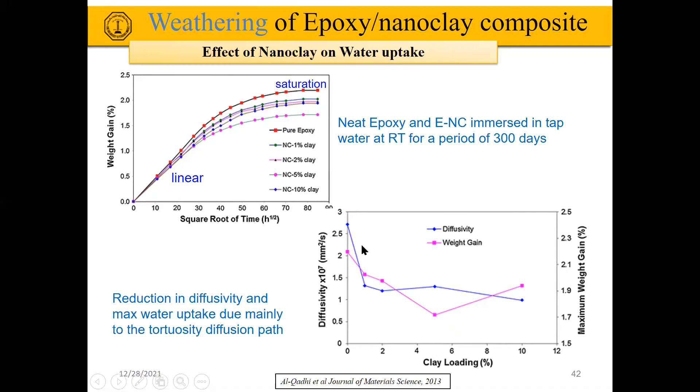If we look at the diffusivity and the maximum weight gain with clay loading, you see that the diffusivity decreases rapidly after 1% of clay loading. The maximum weight gain also decreases, and after around 4%, there is so much scatter here, it seems like it is saturating after 3%. So the presence of clays, especially in the exfoliated structure, reduces diffusivity and reduces the maximum water uptake.

How does that affect the tensile strength and modulus of elasticity? We looked at the tensile strength before and after 1%, and this is the same result we have seen. But what if we expose it to water? You can see the blue line here, there is also an increase in strength due to the presence of 1% clay. The crude oil affects the behavior less because the ingress of crude oil is little compared to that of water, maybe because the crude oil molecule is large.

The same thing can be said about fracture strain. Because we are running out of time, let me move to the glass fiber, the hybrid glass fiber nanoclay composites. This is another project we have done. We made a hybrid nanocomposite, meaning the matrix here is not epoxy by itself, but epoxy with nanoclay.

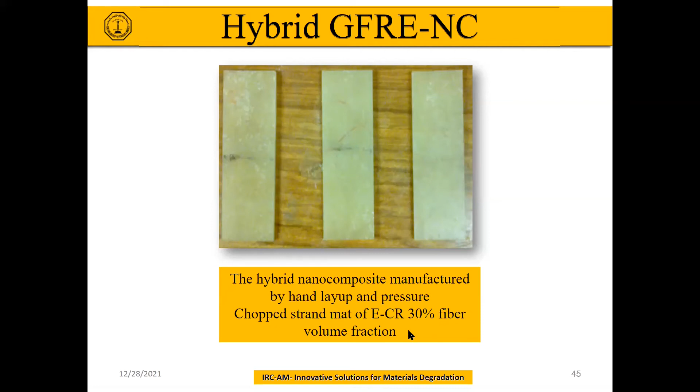We used hand layup and pressure, chopped strand mat and fibers at a volume of 30%. We looked at the flexural strength of the glass fiber and how it's affected by the addition of nanoclay. This is the epoxy, this is the glass fiber reinforced without nanoclay, and this is the glass fiber reinforced with nanoclay, which we call the hybrid nanocomposite.

After adding 1.5% of nanoclay, we increased the strength of the glass fiber epoxy by 11%. Going to 2%, we still have about 8%. But as you go higher, because of the presence of clusters and stress risers, the flexural strength reduces. The same can be said about flexural modulus: 1.5% increases it by about 14%. So nanoclay generally results in improvements in strength and stiffness of epoxy glass fiber material.

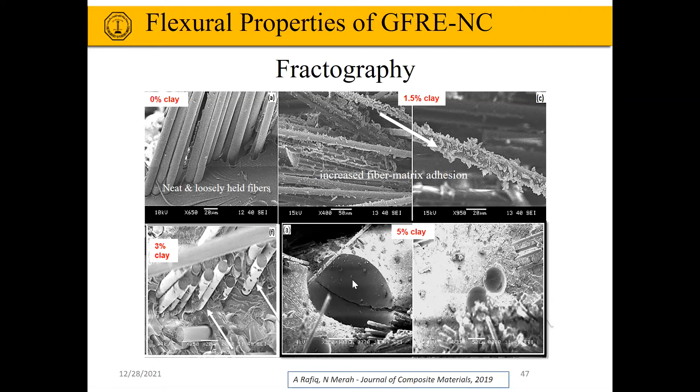Why is that? This is 0% clay - you can see the failed surface has neat and loosely held fibers. But with 1.5%, we see increased fiber matrix adhesion. At 3%, we go back almost to the same behavior with neat fibers. At 5%, we start having clusters and voids, which reduce the strength of the material.

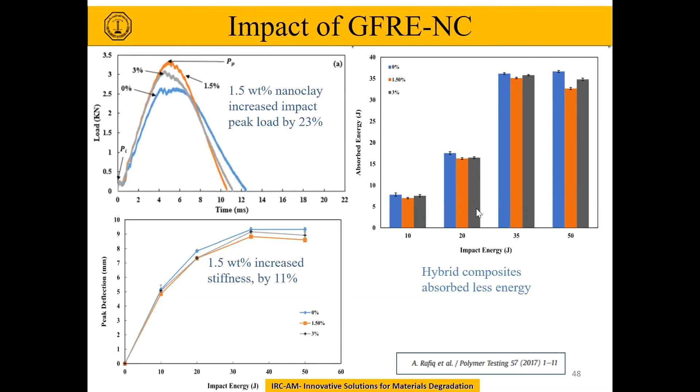We also looked at the impact behavior, and these are some of the results. Again, the exfoliated structure has a higher peak load, less peak deflection, and absorbs less energy under impact. Physically, this is what we have observed.

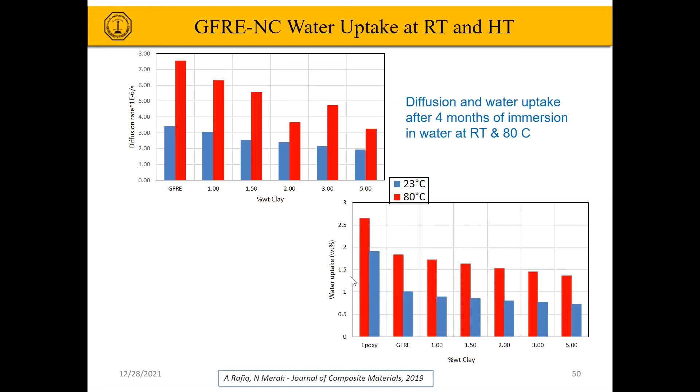Finally, we looked at the effect of temperature and water on the diffusion rate and maximum water uptake. At 80 degrees, the diffusion rate is a lot higher than at room temperature. The maximum water uptake is also higher, which we will see results in reduced flexural strength. Water at high temperature reduces even more the GFRE strength.

Finally, we conclude for this second part that addition of nanoclay to epoxy improves its moisture barrier at room temperature and high temperature. Exfoliated structure was obtained for clay loadings between 1% and 2%, and these resulted in optimal mechanical properties. Higher clay loadings result in agglomerations and voids, which make them lose their reinforcing ability.

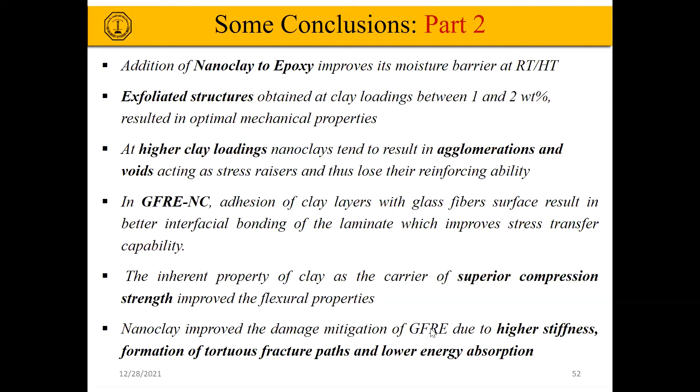Glass fiber reinforced epoxy with nanoclay has more adhesion to the fibers and increases the stress transfer capability. Superior compression strength of clay improved the flexural properties, and damage was mitigated by the presence of the clays, because they create a formation of tortuous fracture paths, resulting in lower energy absorption under low velocity impact.

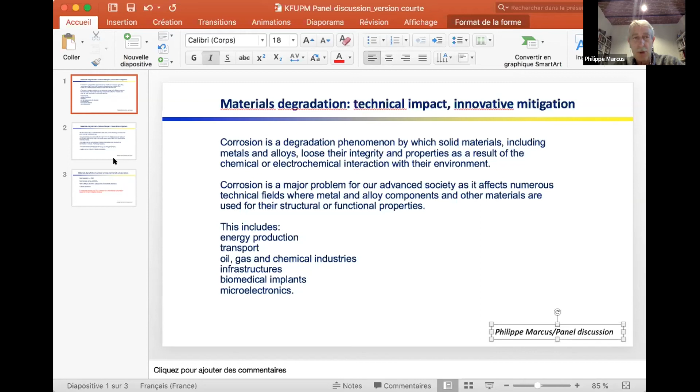I have just listed a list, which is not exhaustive, of areas where corrosion is very important: energy production, transport, oil and gas and chemical industries, infrastructures like roads and bridges, which could even include transport of gas and oil. Biomedical implants should not be forgotten, because even if it's small in tonnage, it's big in importance. And even in the microelectronics industry there are major corrosion problems, and there are actually new corrosion problems that appear due to regulations on the use of chemicals. So chemicals have to be changed, and this causes problems, for example, in the chemomechanical polishing of semiconductors.

Now, of course, there are other impacts related to technical problems. Safety can be compromised in fields where safety is a must, and I'm thinking in priority of the aeronautic industry or the nuclear industry, where there is absolutely no room for any failure.

Of course, this would be true for the oil and gas industry, but I think that safety is maybe even more important for an airplane or nuclear power plant. The environment can be put at risk, and this is true for oil and gas transport, if there's a failure due to stress corrosion cracking or fatigue corrosion. And of course, health can be at risk via contamination of the environment, but also for metallic bio implants. Corrosion of materials implanted in the human body is obviously not something that we want to face.

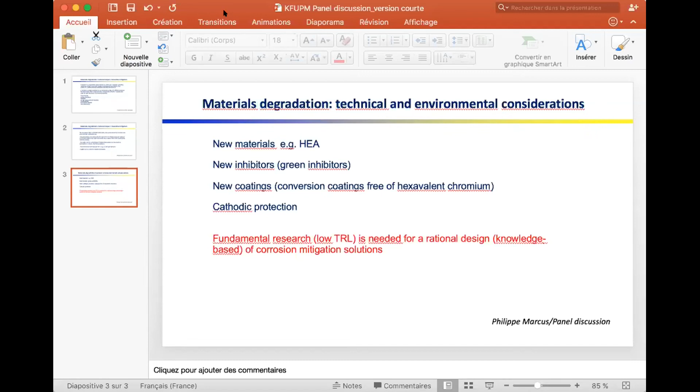Dr. Zuhair, currently the kingdom is proceeding in the Vision 2030 and trying to target localization and diversification of economy. We'd like you to give us your point of view about the role of localizing innovative solutions in the economy, especially related to material degradation.

Thank you, Dr. Fadi. I prepared 2 slides, if I can share it with you. Sure, Dr. Rami, could you please allow Dr. Zuhair? Yes, please, go ahead. How can I share it now? It's not shared, Doctor, go to share screen. It's not showing up here, the whole thing is not shown in your chat. I don't have the full option of Zoom. What should I share screen? Share screen, yes. It's not active. I think Dr. Rami should make Dr. Zuhair a speaker. I cannot do it. Actually, this should be defined by the system. Can you send it to me, Doctor, by email? Okay, never mind, I'll talk briefly. Sorry for that, sorry for that, I'll talk briefly.